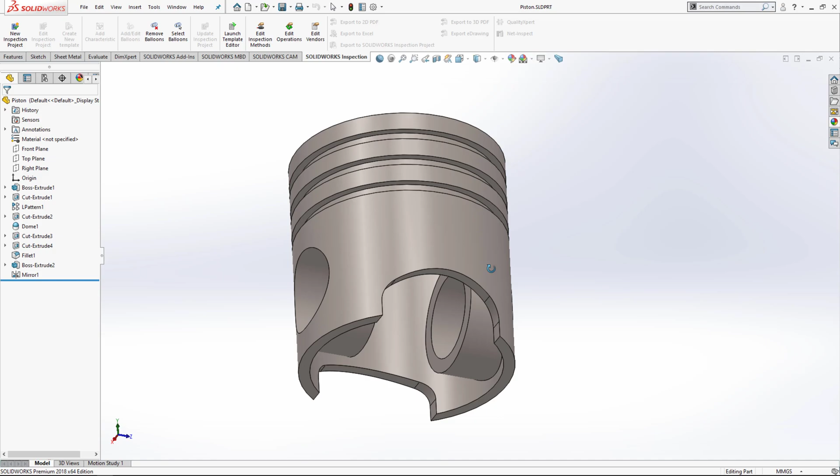Today I am going to show you how to make a piston. So first of all, I go to the file menu and open this file. This is my piston file. So I click open. This is my piston which I made yesterday. So I'm going to show you the process of how I made this.

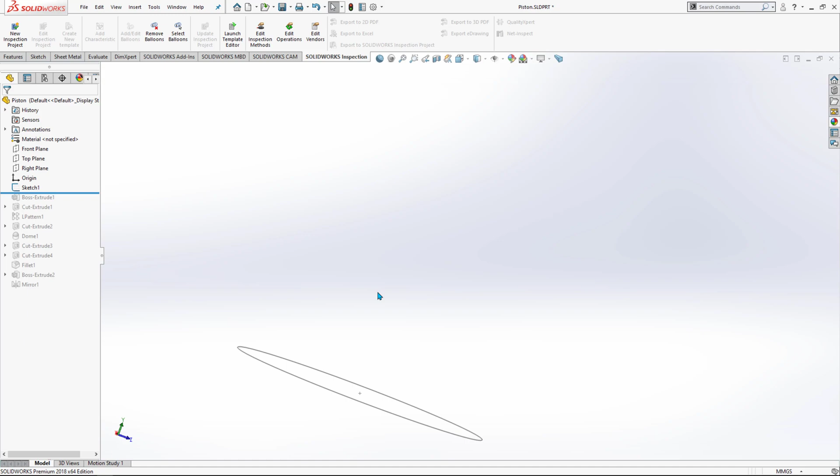So first of all, you start from a sketch. This is my first sketch. If I edit this here, this is the dimension of the sketch. This is 85. This is 85. Okay.

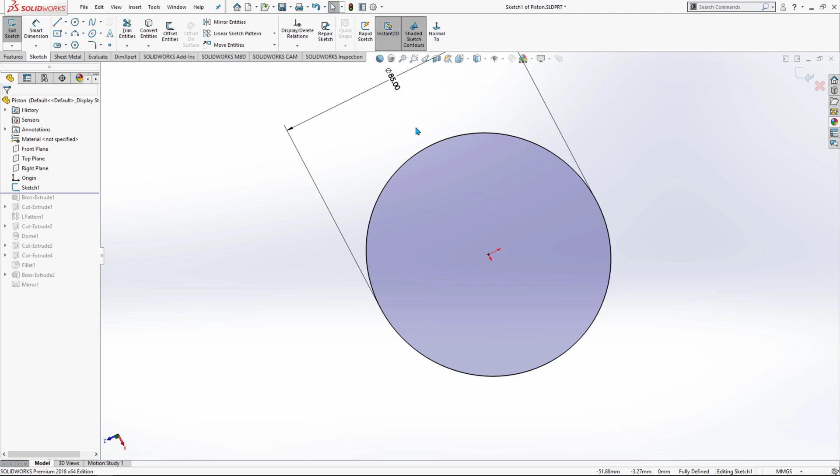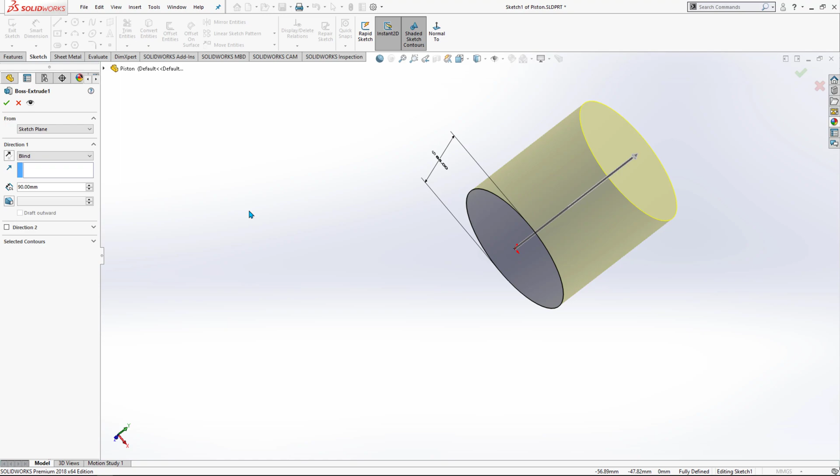After creating this, go to the feature menu and extruded boss/base. So I extrude this, and I extrude this up to 90 millimeters. This is my extrude to 90 millimeters. Then

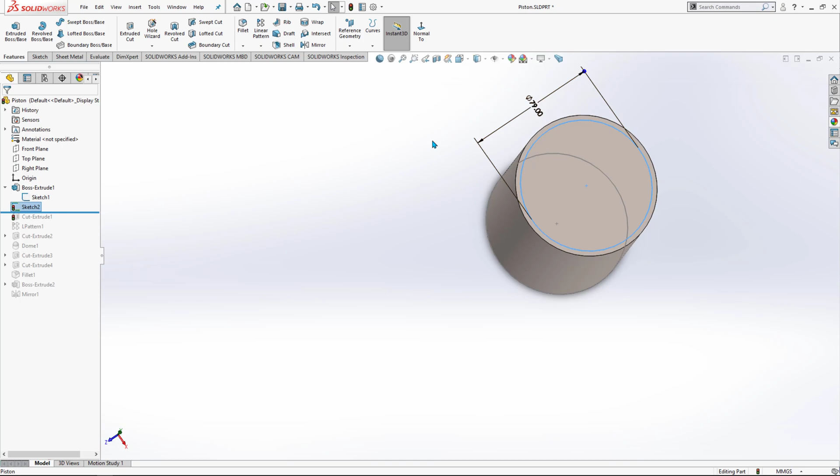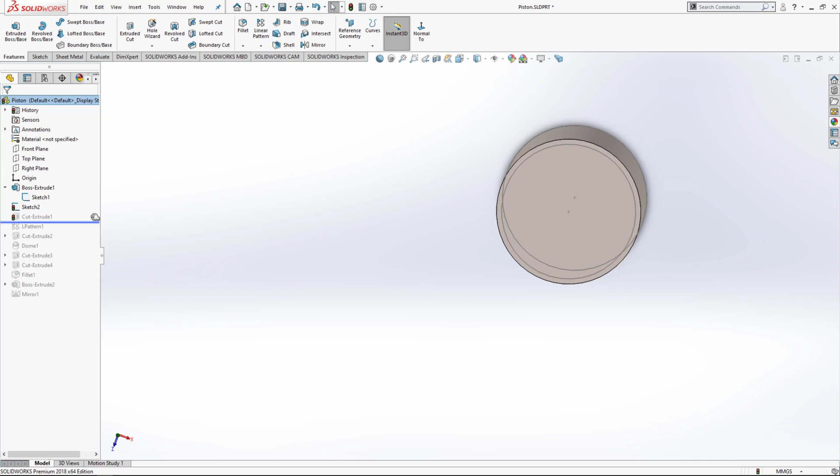I sketch this. This is a circle with a diameter of 79 millimeters. This is the 79 millimeter circle. Okay. After creating a circle concentric with the previous circle, yes, I made this first one. Then apply cut extrude.

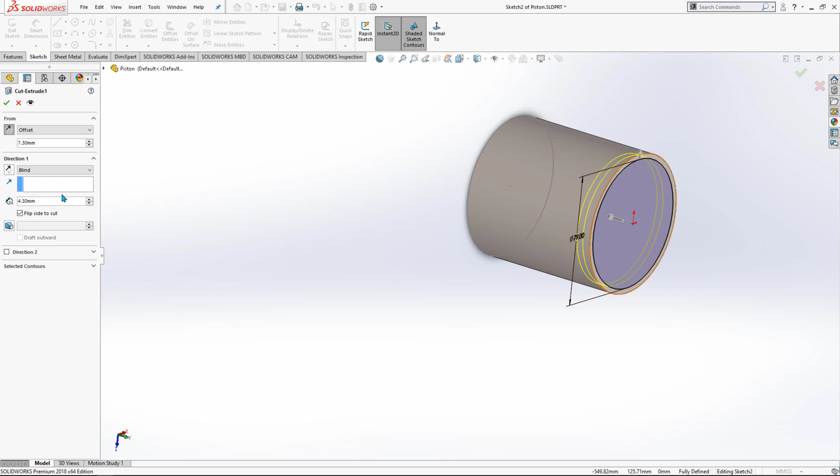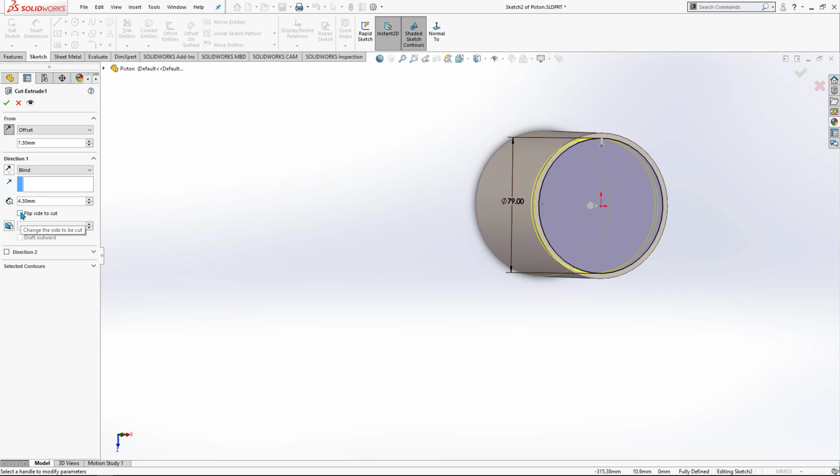This circle is drawn here, at the origin point of our part, so I offset this from the origin point by 7.3 millimeters, and the cut extrude is 4.3 millimeters. And it's not this side, this is flip side to cut. Okay, it cuts the outer part. This is my circle, and this cuts outward, so flip side to outward. So okay. So this is my cut extrude.

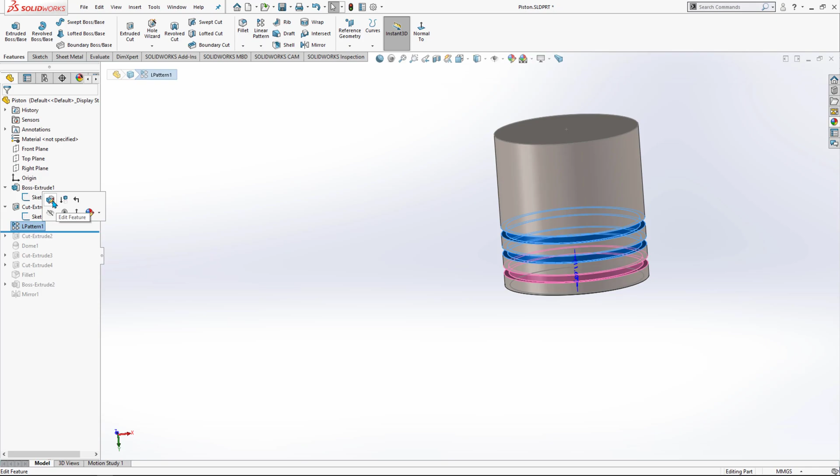After the cut extrude, I make a pattern, and this is 3 patterns. This is my pattern. You will find this linear pattern here. For the axis of the pattern, I use this axis. If it doesn't show, please go here and click view axis, then it will appear here. And here the spacing between cut extrudes is 11.6 millimeters and the number of cuts equals 3.

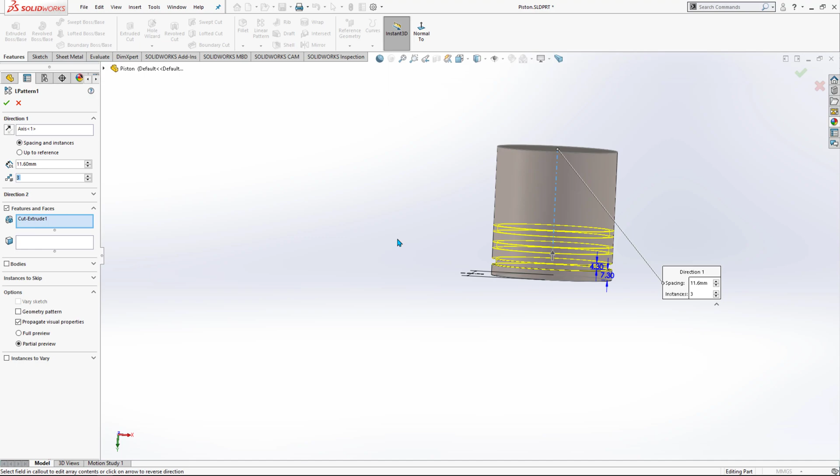If I increase the number, this will increase. Okay, and our pattern feature is the cut extrude. If you can't select this, go to this drop down and select this cut extrude. So this is our piston ring pattern created.

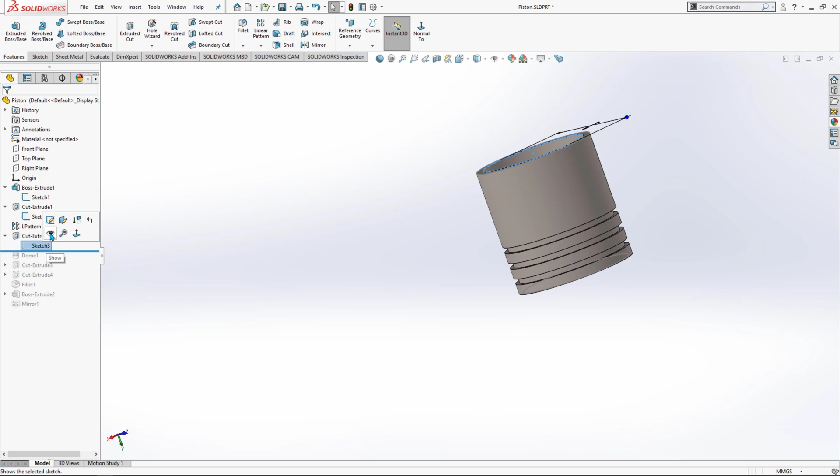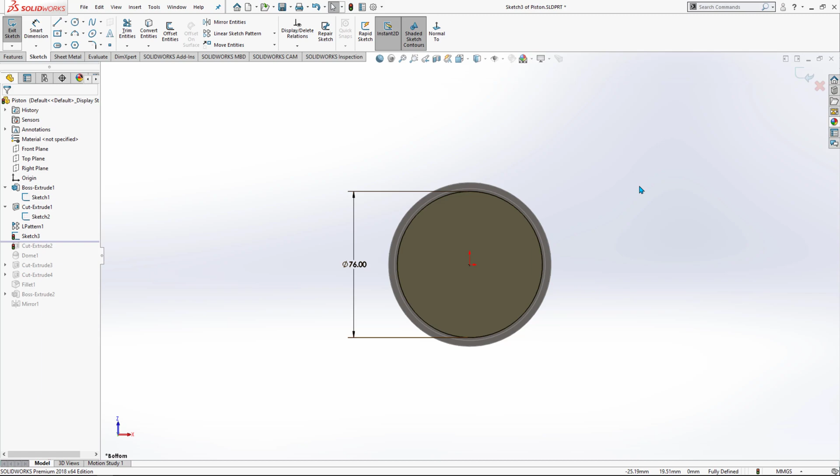After this, I create this sketch. This is also concentric with the origin point, and the diameter of this sketch is 76 millimeters. After creating this, go to the feature menu and use extruded cut. I exit this and here is extruded cut. So I use this extruded cut,

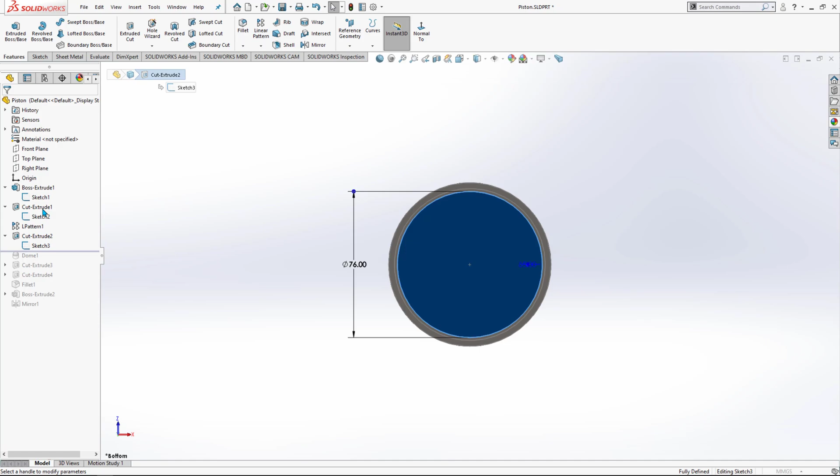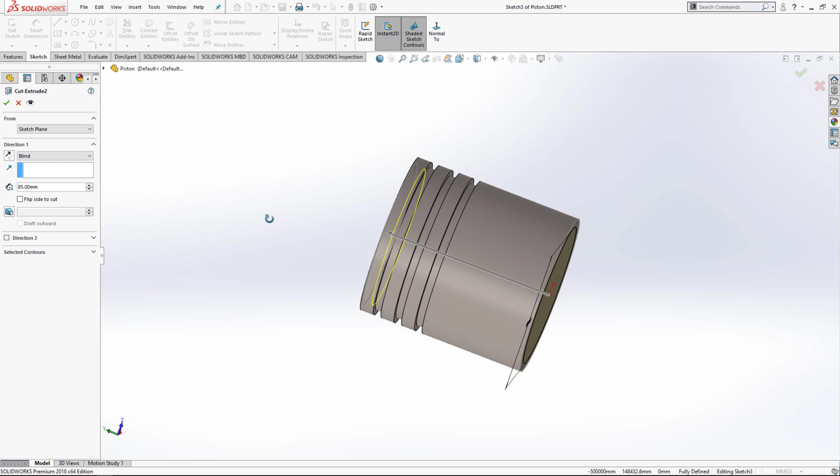and this extruded cut is from this plane up to 85 millimeters. 85 millimeters. Okay, our total length was 90 millimeters, this cut is 85 millimeters, so the uncut thickness is 5.

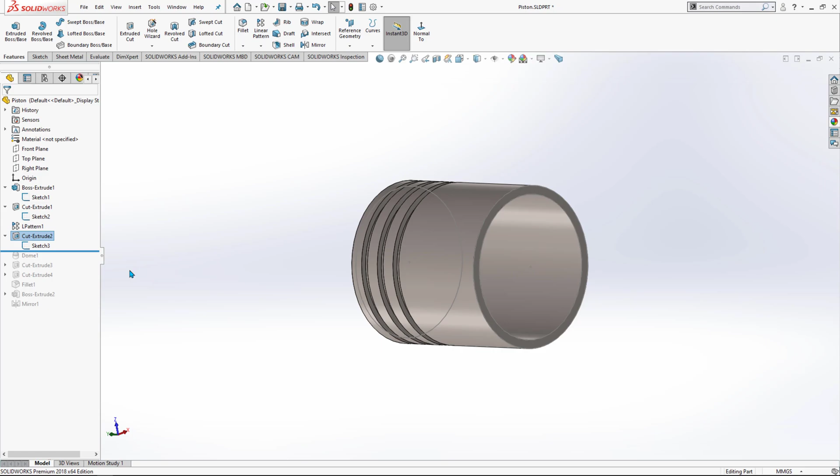After this, I create a dome, and this is for our design. This is our dome. If you don't find this tool, go to command search and search dome. It will show you where the dome is. The dome is in Insert, Features, Dome.

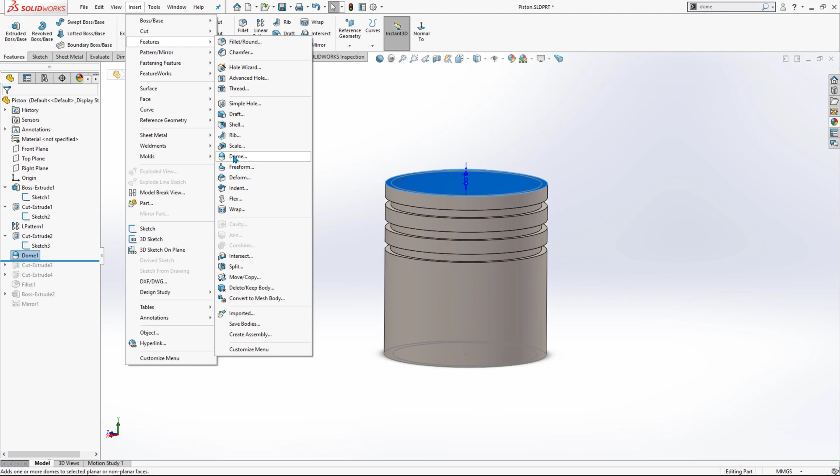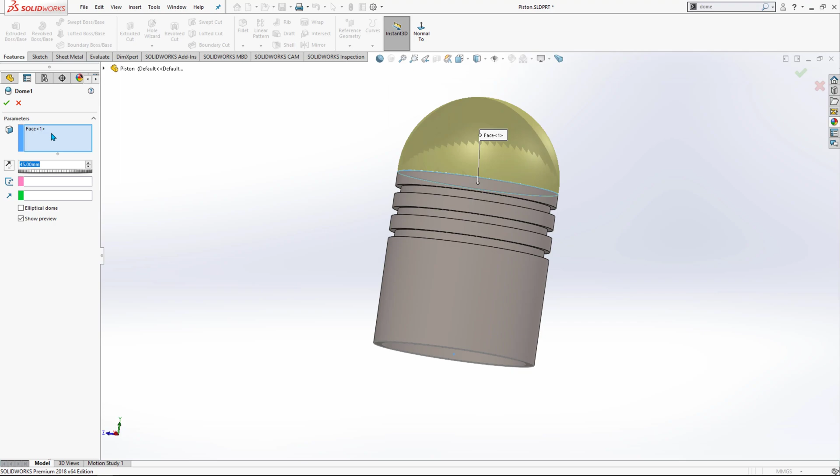Okay, so this is the dome face. We selected this face to dome, and the dome distance is 5 millimeters. So this is our dome. If I increase this, it will increase. So after creating the dome, we use this cut. For this cut, I use a sketch.

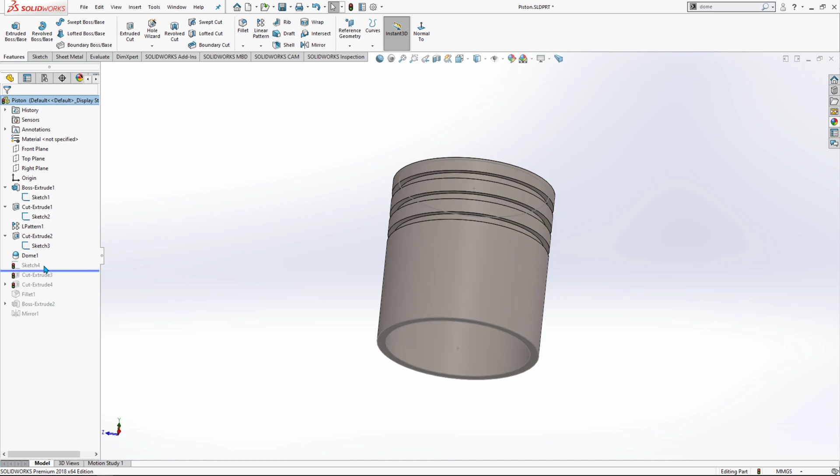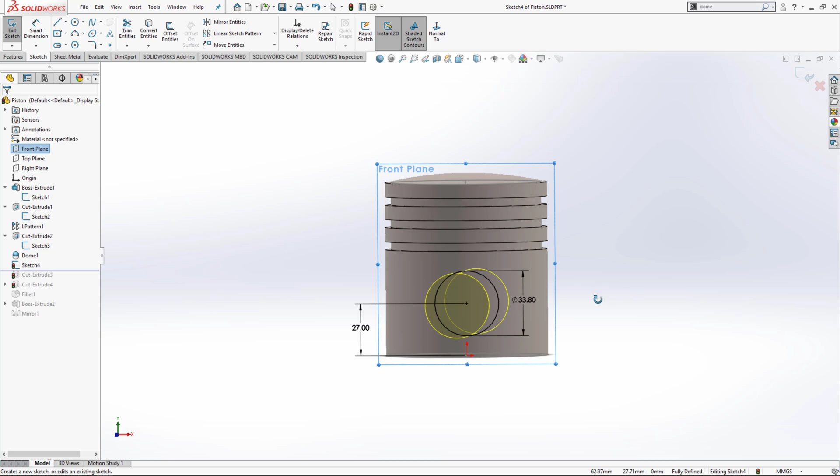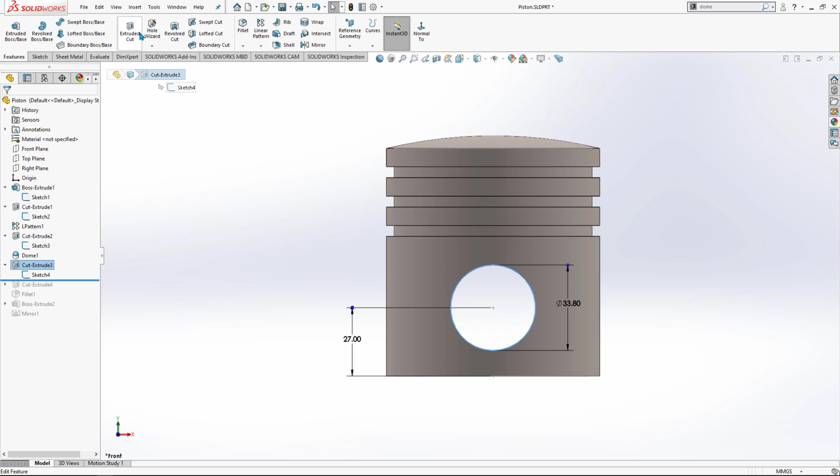And this sketch is, I think this is right plane, no, front plane. This sketch is drawn on the front plane here, and the diameter of the sketch is 33.8, and the distance from the origin to this center is 27 millimeters. So after sketching this, use cut extrude. The cut extrude feature is available here, and this cut is through all, both directions. It will cut all the way through. Okay.

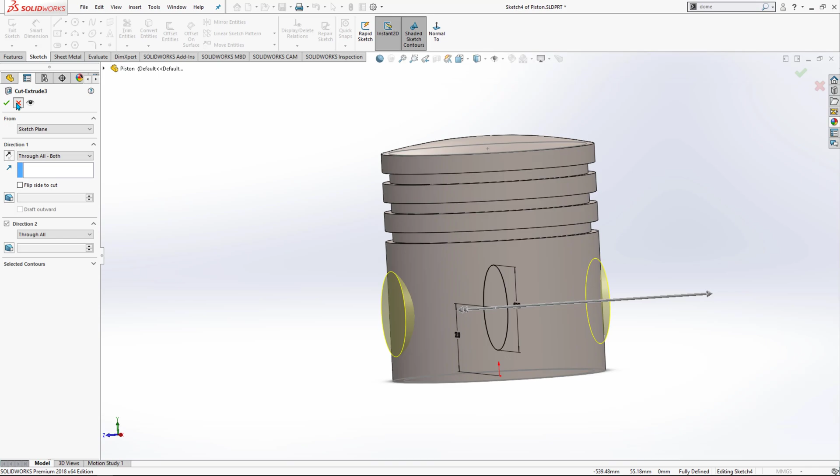After creating this, this sketch was drawn here, and you can draw this with the line tool, and this can be made with a 3-point arc also. This is 50 millimeters, this height is 12 millimeters, and the radius of this circle is 40 millimeters, and this circle center is not coincident with the origin point. This is here.

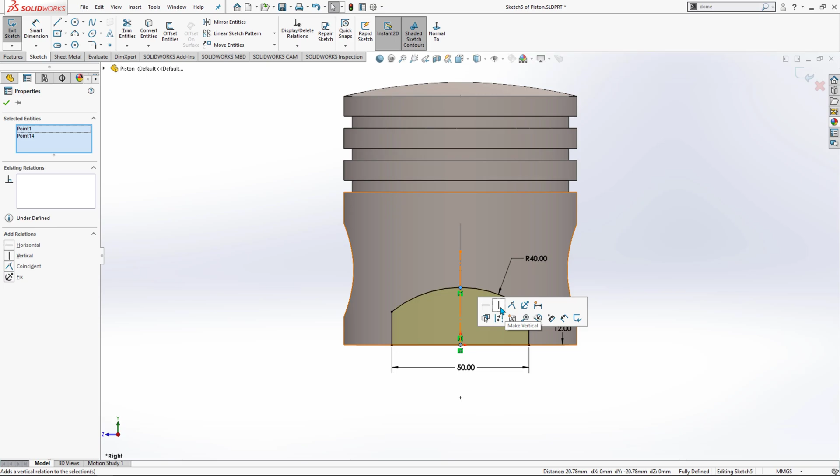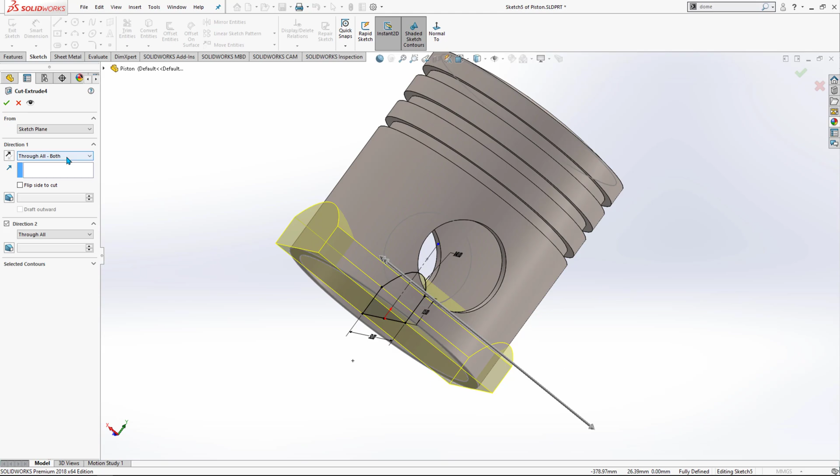If this sketch is not fully defined, the relation between this and this will be vertical. Okay, and then this circle will be in the right place. Okay, after creating this sketch, go to cut extrude and extrude this through both. This will cut this, and our basic cylinder is almost complete.

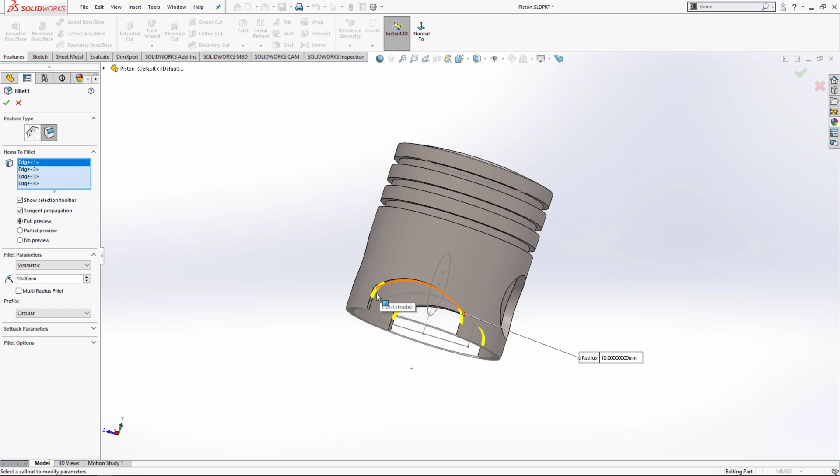Then after this, go to the fillet option. The fillet option is available here, and click this edge. I selected 4 edges, and the radius of this fillet is 10 millimeters. Okay, then create this boss extrude.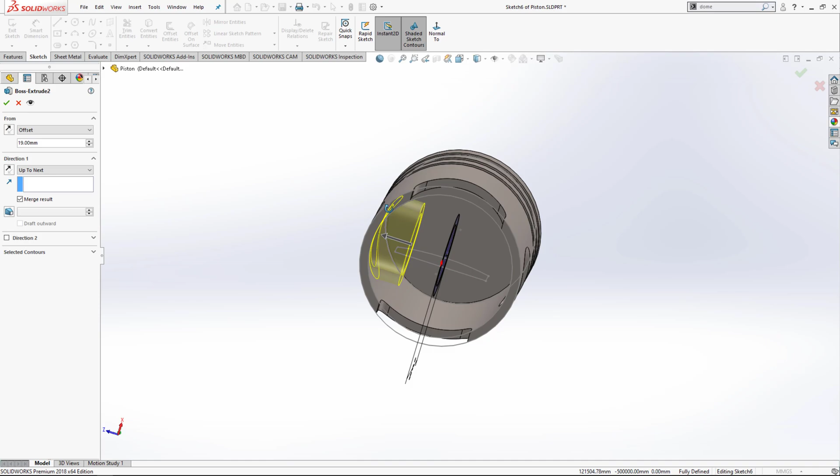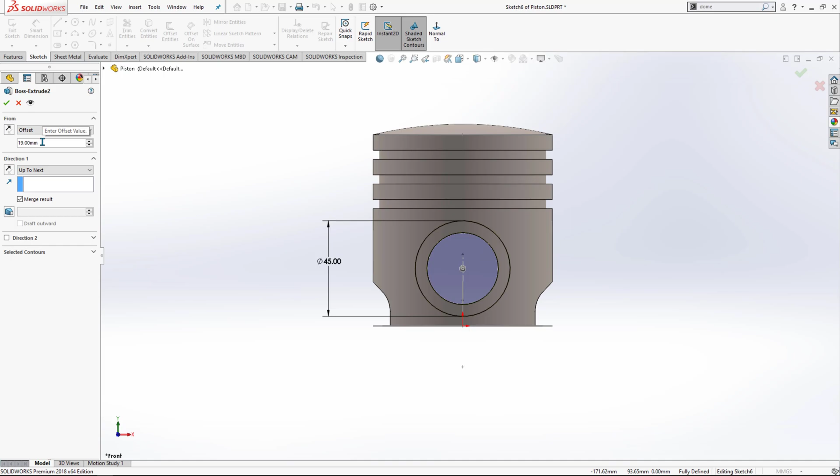Okay, so this boss extrude is done using a circle. The diameter of the circle is 45, and this is offset 19 millimeters from the front plane. Okay, and up to next, so this will extrude up to this surface.

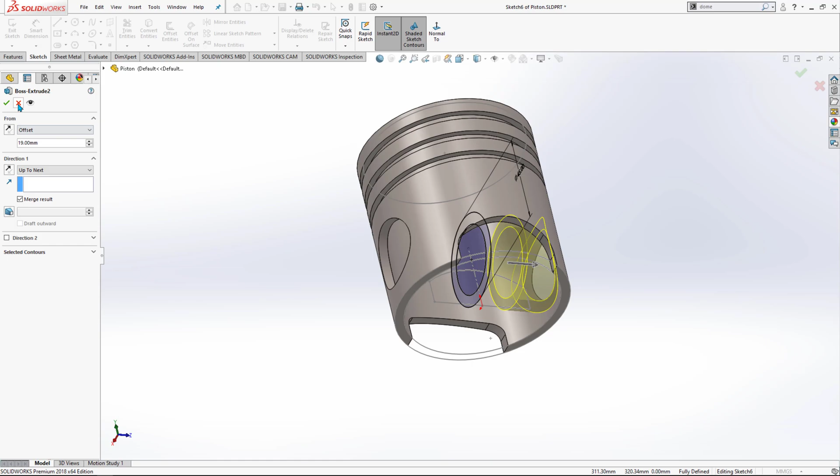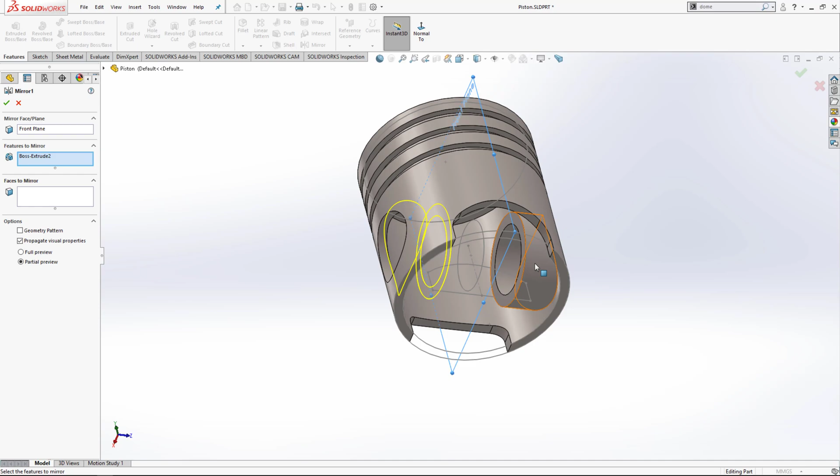And after this, mirror this component using mirror. Then select this feature, mirror face or plane. First of all, this is our front plane, and for feature to mirror, I want to mirror this feature, so I selected this extruded boss. If you can't select it here, you can also select it from the boss extrude here. It will mirror this.

So this is the process of making a piston.